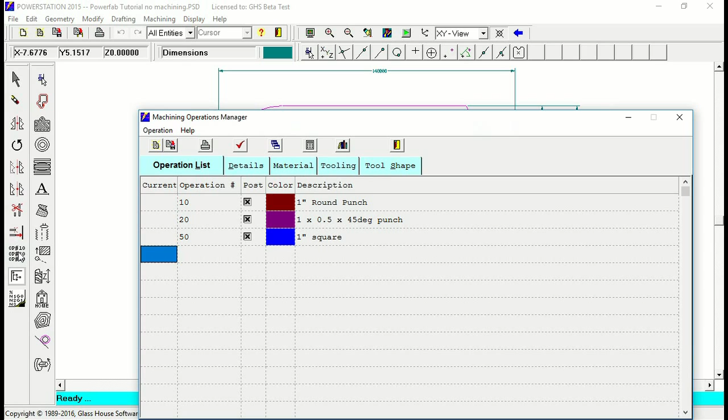First thing we want to do, just like with mills and lathes, is define the tools. Here I have some basic tools in here already, but just to show you what it would look like if we look at this on the details, the layout of the screen changes here a bit, and your punch tools are now available where it says punch parameters. This is just a simple round 1-inch tool. If we go back to the list, we can go to details. Here's a simple square, rectangular actually, 1 inch by ½ inch tool. It's an indexable tool. Again, you'd fill in this list with any tools that you need.

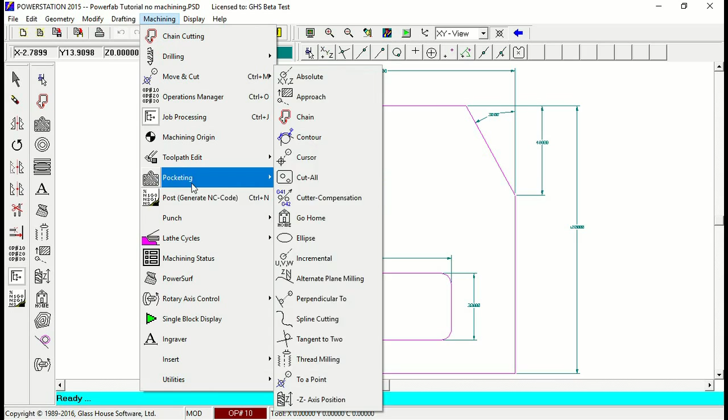Let's start with the 1-inch round punch, and I'm going to do these in kind of an order that makes sense to me. Naturally, you would do them in the order that you want. Machining, punch, and I'm going to start by nibbling that radius up on the top left corner there. Nibble an arc, and it wants you to define a cusp height.

Okay, select the arc to be nibbled, say that one. That also selects the end of the arc that you're going to start at, and now the approximate point. It wants to know which side of the arc. Are you nibbling outside of it or inside? We just click the mouse anywhere outside, and it shows a nibble on there. Okay, that's it for just nibbling arcs. Escape out of this. Okay, now for the next thing I'm going to do this circle here.

I want to talk one second about the way I have the system set right now. I have the power snap option on right now. The button is pressed in. You see it goes out and in. And I also changed the snap mode, the point mode, to cursor, so that every time I go to use it, it'll automatically use the power snap option, which for work like this is ideal. It makes things a lot quicker.

Without the power snap option on, if you want to select the center of a circle, you'd have to select from the menu, give me the center of the circle, and then go and select the circle. With the power snap option on, you just get the cursor somewhere near where you want it to be. It tells you you're in the right spot, and you go. Let me do the hole now. Punch. Let's do this hole. Again, the cusp height. And select the arc.

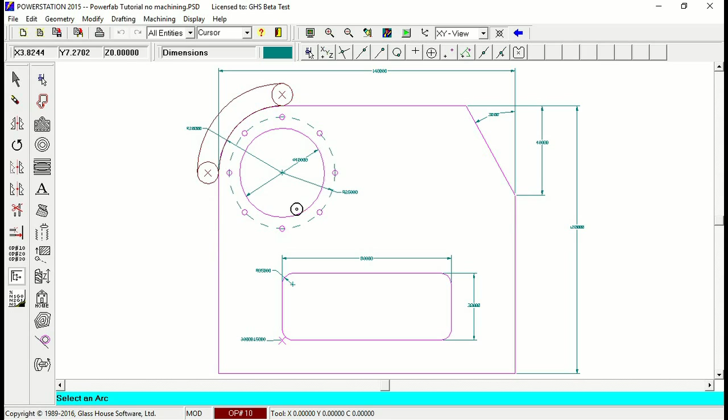This is the hole we're going to make. Remove the center slug? Yes. If you just wanted to punch around the periphery and leave a slug, you'd say no. And it generates individual hits down the center to rough out the material in there, and then finally does a single nibble command to go around there.

Alright, next thing I want to do is this same punch is going to be used for the corners of this rectangle. So I'm just going to say machining, punch, and single. You see, this is what I was talking about with the power snap, where it just automatically jumps to points on the part. In this case, I want to do them at the center of the arcs. Center, center, and center. And press escape when you're done.

Okay, that's looking good. I'm jumping around here, but naturally you could turn off the dimensions if you didn't want to see them. In this case, they're on a different layer. We could simply turn them off. A part like this, it's not too complicated. I can leave the dimensions there. They're not really making anything difficult to see.

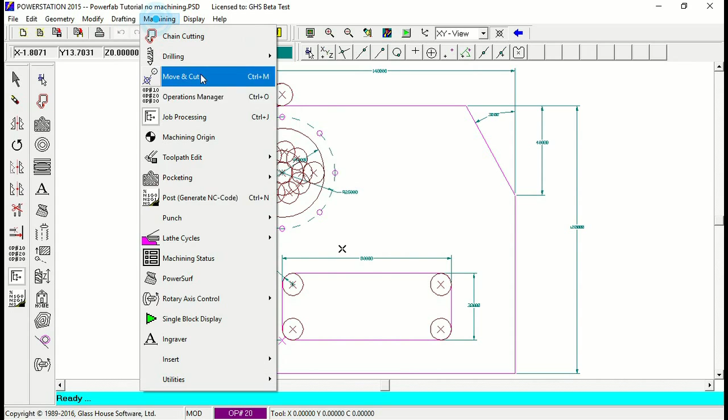Alright, got this rectangular punch over here. We'll use that to nibble that top right corner. So we say machining, punch, nibble a line. Again, the cusp height, and that's my line, and go over to that side. It nibbled the line.

Okay. Now let's go with the 1-inch square to hog out the rectangle down there. We can say machining, punch, rectangle. And for the corner of the rectangle, I actually cheated and defined a point right at the corner. With the drawing capabilities of Powerstation, very easy to do that.

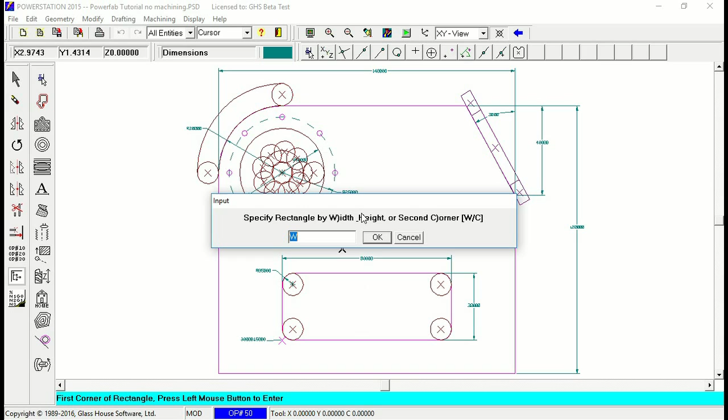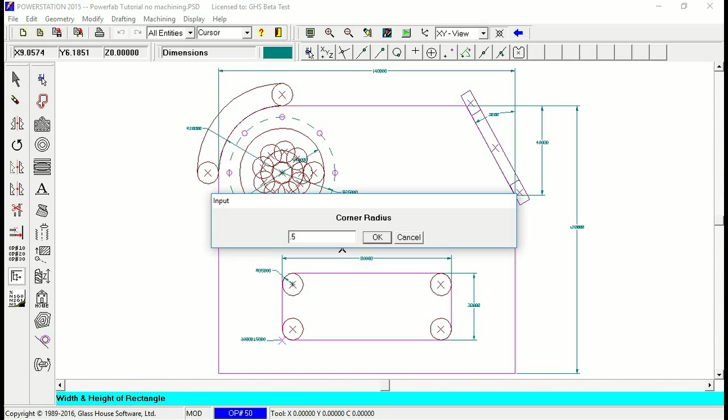Give me that point. Rectangle by width and the height, yes. Okay, so the width and the height, I'll use the coordinates. The width was 8, and the height was 3. Yep, height was 3. The corner radius, as we did with that 1-inch punch, is a 0.5. And the base angle of the rectangle is 0. It's flat. It's just a straight rectangle.

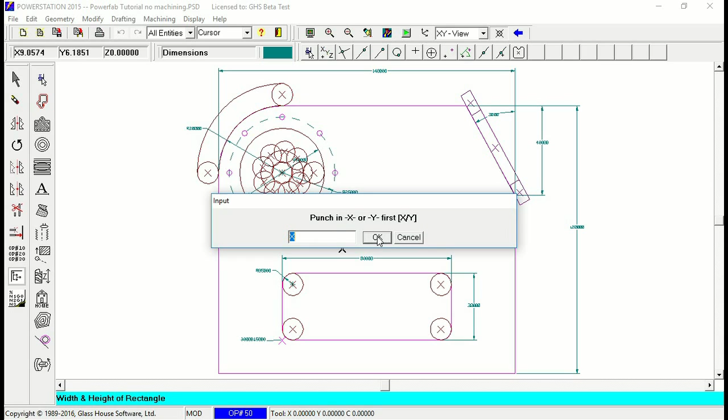The minimum overlap between punches. And remove the center slug. Yes. Punch in X or Y first. We'll leave it X and go X first. So that just punched out the inside of the rectangle.

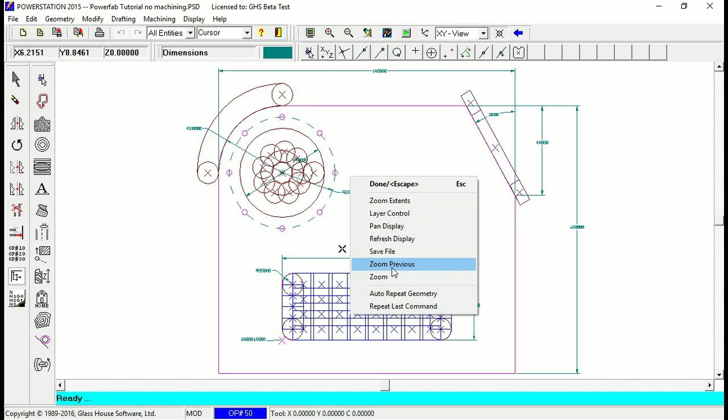And okay, for the last one here, I need another tool to punch these holes on the bolt circle, and I'm not sure what size those holes are. So let's do this. Let me zoom. So this is a little bigger. Let me find out what size the holes are. Inquire, list an entity. There's my hole, and the diameter right here is 0.25. Okay, escape out. So I need a 0.25 diameter punch.

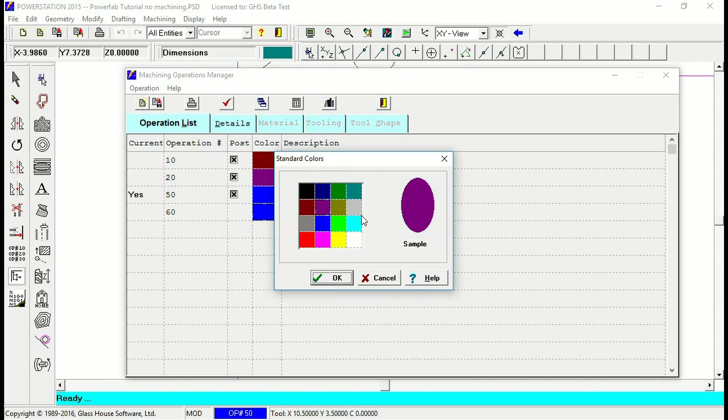Go back to my operations. Let's make a new one here. We'll call it 60. Let's give it a color. I don't know, this mustardy color here.

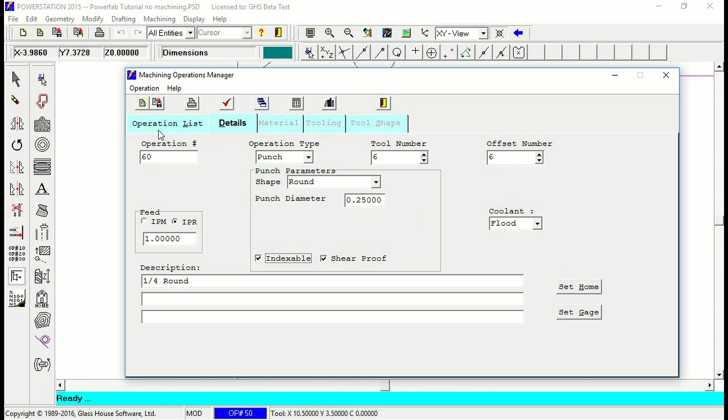Hate mustard. Okay. It fills it in with whatever the last tool was described as, but you can just change it. Round. Okay, 1/4 inch round. Set this back to round and the diameter to 0.25. Okay. And back to my operation list. Make sure this is now the current. Exit. And let's do that bolt circle.

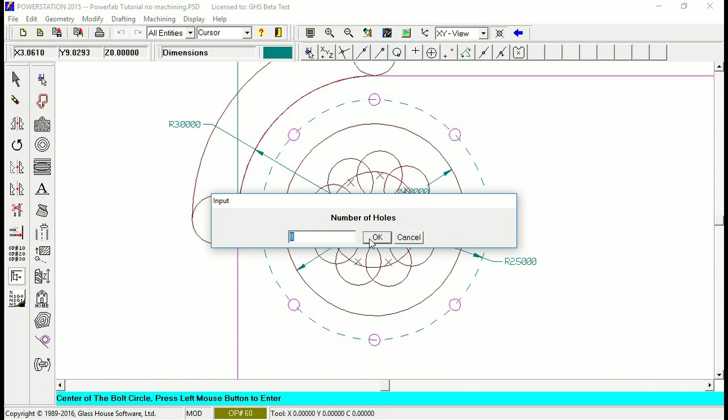Machining, punch, a bolt circle. Okay. Center of the bolt circle. Again, the power snap is on, so I can just move it around until I get close. As soon as I get down there, it says center. So it's good. There were 8 holes on here. The bolt circle diameter is a radius of 2.5. As with everything in Powerstation, you can always do math as you're putting it in, times 2, because that's the radius right there. So I want to double it and make it the diameter.

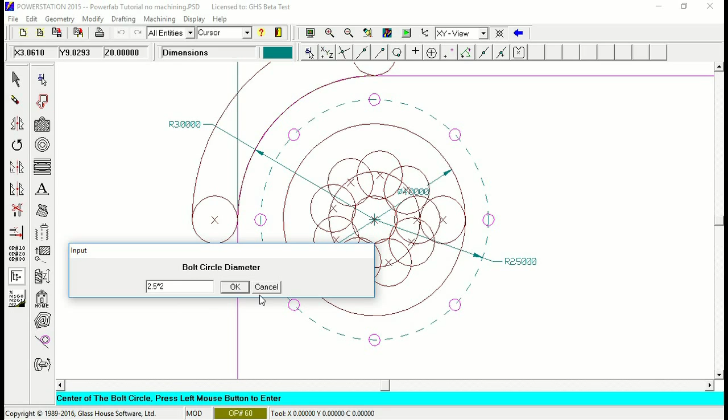Angle of the first hole is 0. Clockwise. C-axis rotation, there's no C-axis being used on this. So now it punched all of those holes. Alright, I'm going to zoom extents again, get back to seeing the whole thing. I'm going to come up here and save the file as no machining, this will be complete.

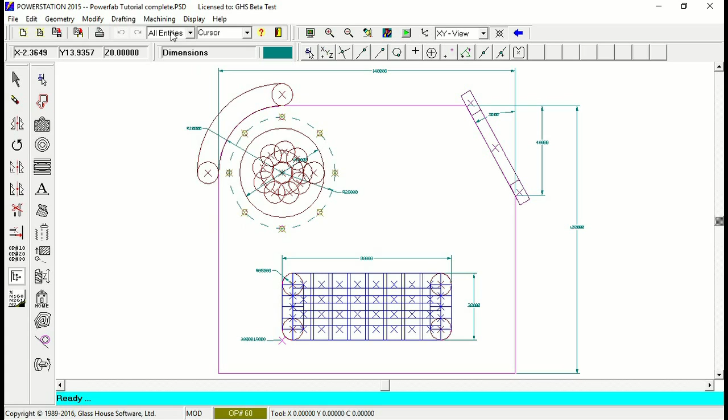Tutorial complete. And the final step will be to run the post processor to generate the NC code. We come over here to the generate NC code, which can be found here or in the machining menu. We select the machine. In this case, I'll select the Amada. We will call it Amada test. You can see I was fooling with that before. Have one of those already. Replace it. And go. So that generated the code.

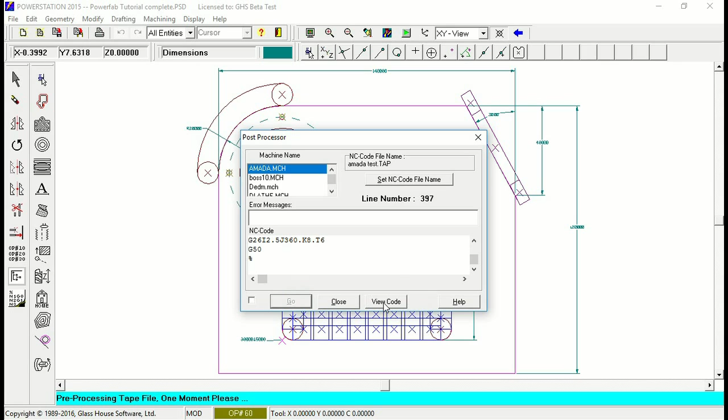If you want to get a quick look at the code right now, you can say view code. A few things to mention about it. You'll see a mix here of both Amada's canned cycles and individual hits. Basically, anything that can be put into a canned cycle will be, such as this G68, I assume is the nibbling we did around the arc. That can be done in a single move. The individual hits to clear out the circle here were done as individual hits to generate the program.

This post is completely customizable. If it doesn't come out to your liking, we can change it to be anything that you want. In fact, right off the top, the G92 is different depending on which size and model of Amada that you have. In this case, we can simply change a post macro and generate the code to your exact specifications. That's it. That's just the basic demo.